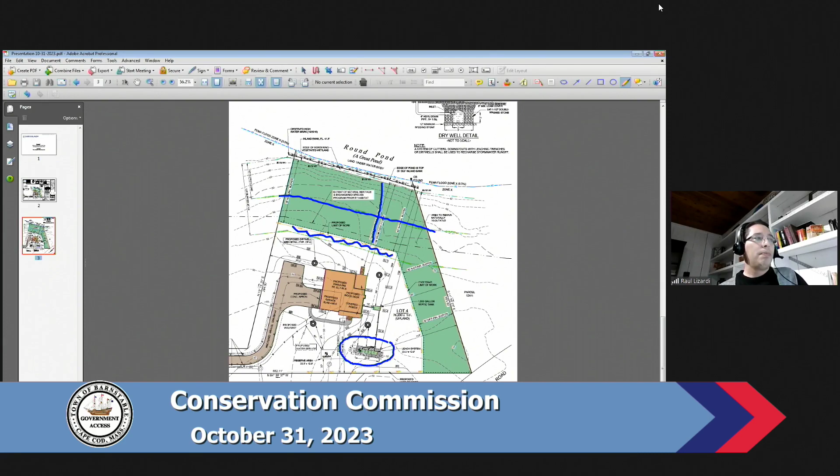The residence will be serviced by dry wells for roof runoff, and the septic system is located more than 200 feet away from that same inland bank. So the project is fairly minimum impact in the resource areas. I'll stop sharing and open it for any questions.

Thank you for talking to the homeowner to locate the house further back, outside the 100-foot buffer. Question from the commissioner? No one?

Any public comment? Channel 18. There's no public comment on this item.

Thank you. Could I have a motion to approve this project as a negative determination? So moved. Second. Roll call. Foster, aye. Tangney, aye. Lee, aye. Kern, aye. Gilmore, aye. That's unanimous.

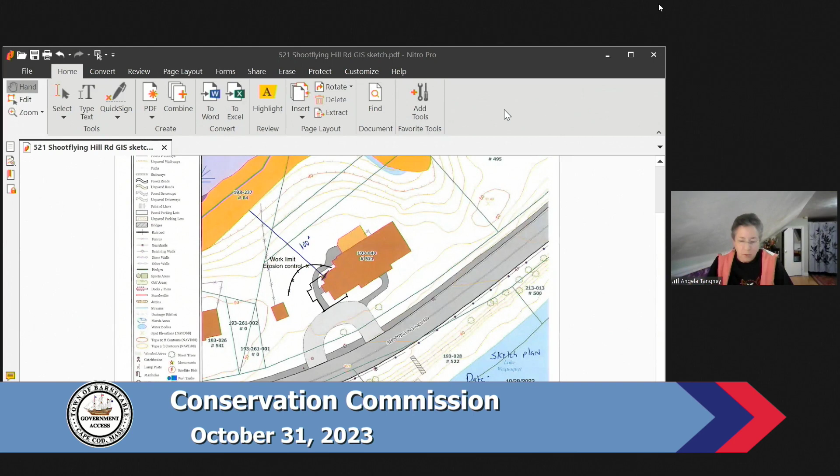Okay, thanks. George? Yeah, that was my question too, was to Darcy and how she felt about this project. So I'm all for it. Thank you. Same with me. I wasn't sure of the scale and the work limit lines, but if those have been answered and I just wasn't aware of them, I'm fine with it too.

Channel 18, any public comment on this? Not at this time. Thank you.

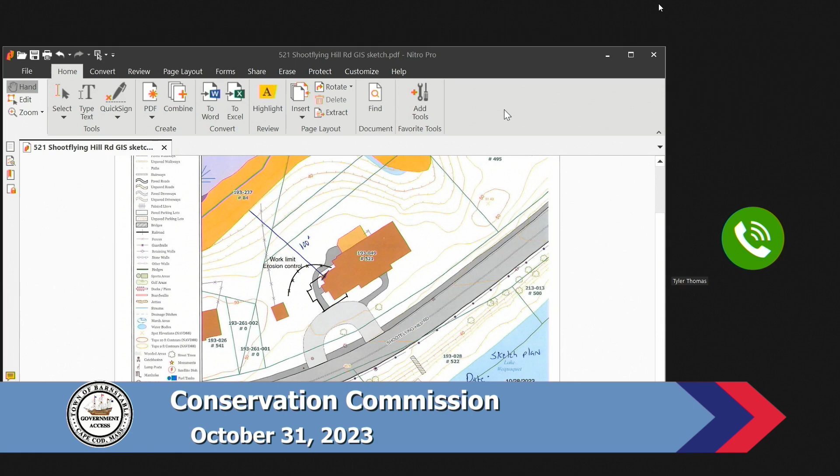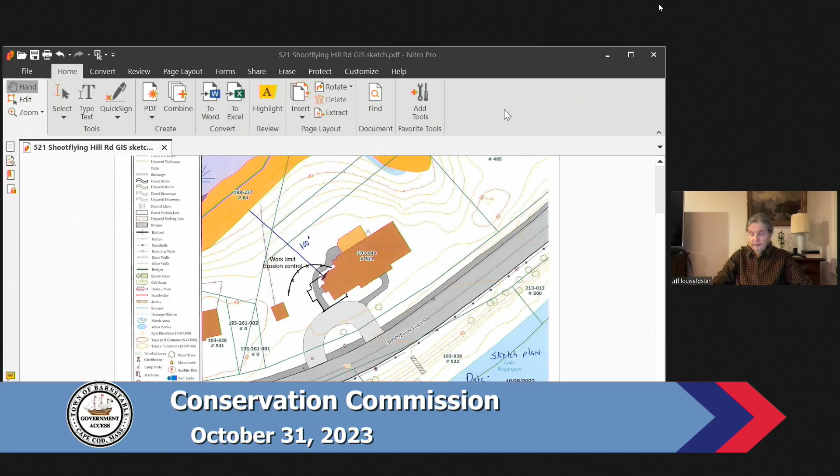Could I have a motion to approve this project as a negative determination? So moved. Second. Roll call. Foster, aye. Gilmore, aye. Hearn, aye. Lee, aye. Tangney, aye. That's unanimous. Thank you.

Good luck, Tyler. Thank you very much. Have a good night. Yep, good night.

The third RDA is Linz A. Vanderslice. Proposed improvement to include 135 square feet addition with a deck on the south side of the dwelling, a dormer and a roof deck on the north side, and a proposed 20 by 20 shed at 43 Little Island Drive, Osterville, as shown on the Assessors Map 093, parcel 058-006. John? Good evening, John O'Day from Sullivan Engineering Consulting, representing the applicant.

I'll pull up the plan quickly for you here. That's going to be on the agenda. One second. Please set that up now.

This is an acre parcel on Little Island. The resource here is flood zone, land subject to coastal storm flowage. A couple pretty minor improvements: a small addition on the south side of the building, 135 square feet, with a little deck area next to it. On the second floor of the dwelling itself, a small dormer over the garage with a roof deck.

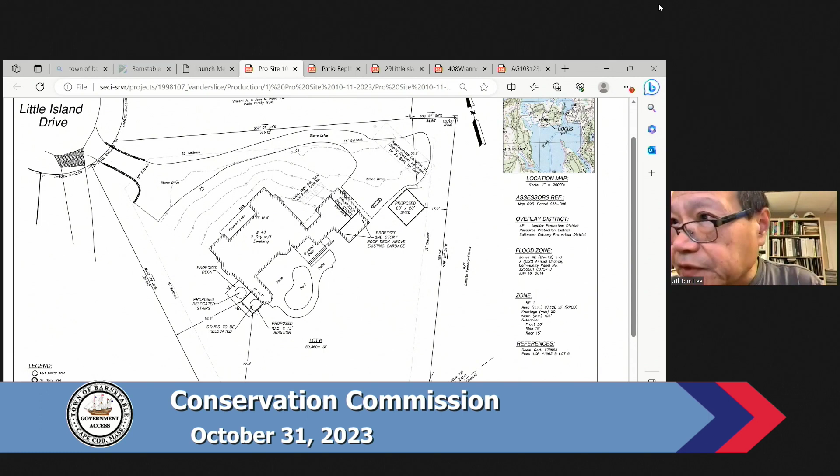Thank you, John. Question from the commissioner. Seeing none here. Channel 18, any public comment on this? No public comment on this item.

Thank you. Could I have a motion to approve this project as a negative determination? So moved. Second. Roll call. Hearn, aye. Gilmore, aye. Lee, aye. Foster, aye. Tangney, aye. That's unanimous.

Thank you. We have 4 NOI tonight. The first one is Michael P. and Maria Sarver, raze and replace existing single-family dwelling at 120 Harbor Bluffs Road, Hyannis, as shown on the Assessors Map 325, parcel 102. Dan.

Good evening, Chairman, members of the Commission. For the record, Dan Ojala. I'm a land surveyor and civil engineer with Down Cape Engineering in Yarmouthport. I'll share my screen here to show you this fairly straightforward project.

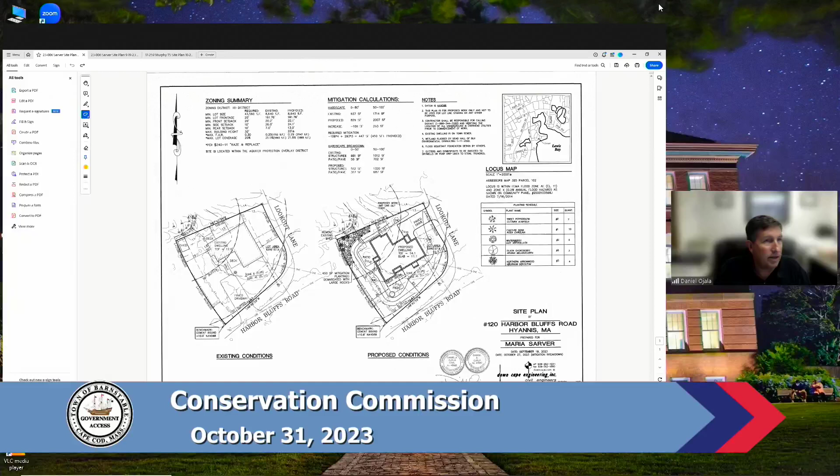This is a small home in an area that has public sewer, so that's one of the big items in this area. We don't have to worry about trying to squeeze in a septic with setbacks and pollution and so forth. So, tearing down the existing home.

There's a small isolated wetland behind us. Some of you may recall, to the north there was a somewhat larger home that was recently given permission to raze and replace. It's contiguous to a small IVW. That one had a fence sort of near the wetland, some of you may recall that. But in any event, this is kind of around the corner.

It's a highly developed site and lot. We're getting rid of a shed that's right against the wetland. There's a little IVW, so again it wouldn't be a state wetland, but it would be local. But then again, we are working in the flood zone a little bit here.

So taking a dwelling that nicks into the flood zone with some space below grade and picking it up, the slab is going to be elevated so that it's above the flood zone. Just a little bit of fill around the house to make it look normal. We're getting rid of the deck, which is close to 17.1, and we're going to be going to 22.7 in the back.

And trying to compress it a little bit towards the front of the lot. We've introduced roof dry wells all the way around to take care of the roof runoff, so we feel there'll be quite a lot less water shooting off or sheeting off this site post-development.

The pre-development runoff is one of the things you can look at in these flood zones. So we feel it's a good site development. It'll be good for the owner, good for the town. Would be glad to answer any questions you have on this one. I know you've got a long narrative, so I kept it short.

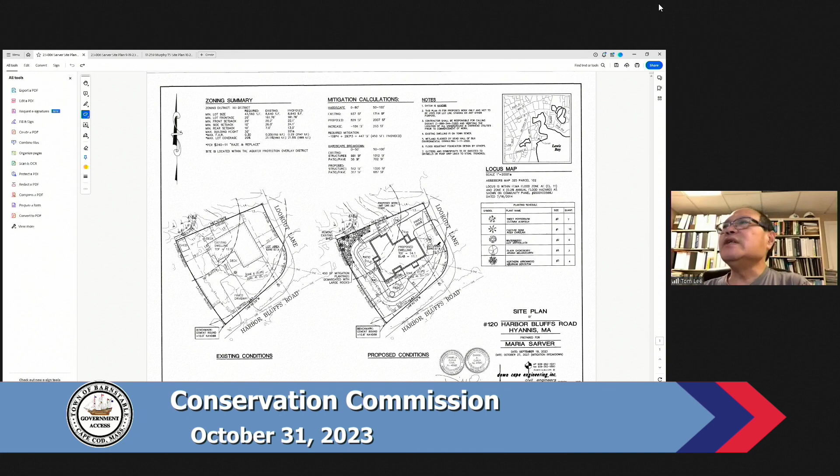Thank you, Dan. The drawing that Dan is showing is dated October the 27th, so it's a revised plan submittal.

George? Thanks, Dan. Thanks, Tom. And Dan, you mentioned a small amount of fill. How small an amount of fill are you talking, just so we know? From past experience, we've had small amounts of fill being anywhere between 50 and sometimes 200 cubic yards. So what are you talking about?

You can see here the grades - right now the foundation is fairly high, it's 12.6, we're going up to 14.1, so it's being raised about a foot. And so we're introducing higher grades around the house. It's already got a 13 contour on the north side here, we're wrapping that around the house.

The most fill is probably 2 feet right under the patio, and then it slopes quickly back down to grade. I'd have to do the arithmetic, but you're probably talking 40 by 40 by 2 feet-ish for fill. So some fill, but again, it's a coastal flood zone area - if you got a gigantic storm coming in and moving out, it won't be a pin in the bathtub with respect to that.

So you're probably under 100 cubic yards. I would imagine, yeah, especially because the house is most of it.

Thank you. Angela? Just quick for clarification, the revised plan - I'm not sure when it came in. I got it yesterday, Monday the 30th, and the only thing was the hardscape breakdown was added, or am I missing something? It was requested to add the demarcation, so there was a little bit better breakdown on the hardscape.

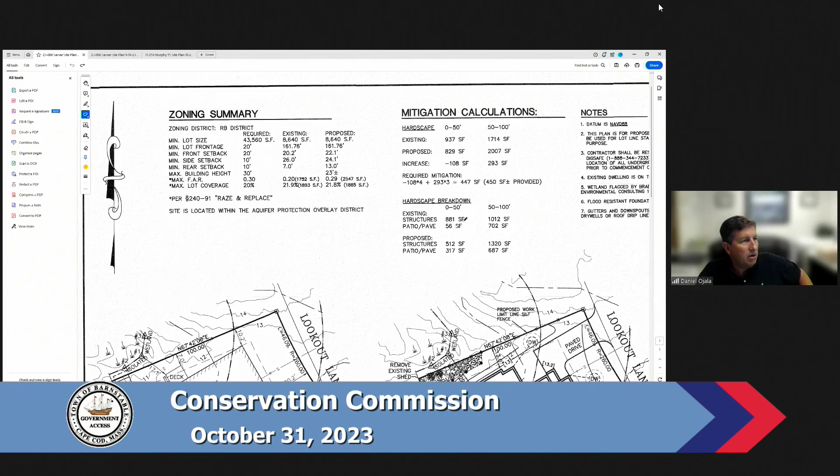We broke it out between patio, pavement, and structures. And then number two, we called out these rocks - there's a few different methodologies for demarcating the wetland, but it was requested that we show that, so that's the other thing we did. I did highlight the contours so you could see those a little bit better on the proposed.

Okay, thank you. I just want to make sure I wasn't missing something. No, nothing major, just little housekeeping items. Right. Because we just need a little bit more breakdown in terms of the mitigation area and so forth, for calculations.

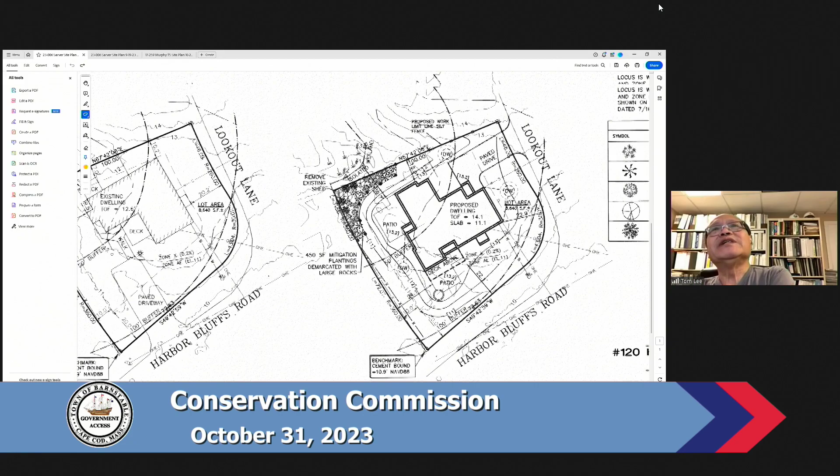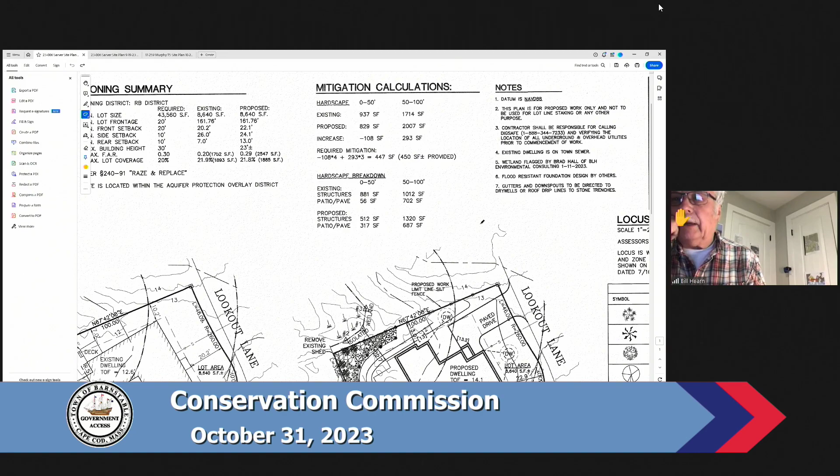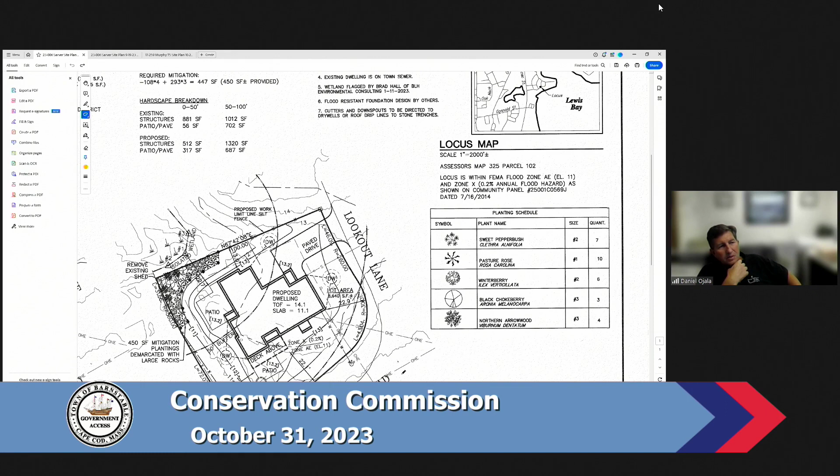Bill? Yeah, there's no mowing going on in that mitigation area, right? You basically just planting it and letting it go? That's correct, yeah, we wouldn't - it would be a no touch. I guess if there were some weeds in there, with Darcy's permission, we might weed it a couple times. But it's designed to kind of take over and become a shrub standalone feature, which would not have any mowing at all. Okay, thank you.

Any other questions? It's 10:18. Any public comment on this? No public comment on this item.

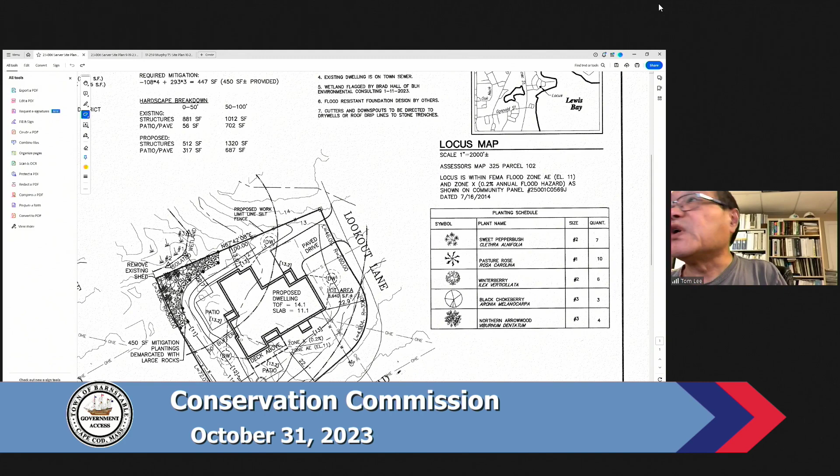Thank you. Could I have a motion to approve this project with the revised plan date October the 27th? So moved. Second. Roll call. Foster, aye. Elmore, aye. Hearn, aye. Lee, aye. Tagny, aye. That's unanimous. Thank you very much.

NOI is William and Krista Murphy, proposed single-family dwelling at 104 Wild Goose Way, Centerville, as shown in the Assessors Map 167, parcel 048. Dan. Good evening again, Chairman. For the record, Dan Ojala with Down Cape Engineering.

I'll share my screen here. So this one feels like I've been working on it all my life.

Here we are again. Honestly, the gentleman is serving our country in the Navy, and he goes off and doesn't know how long, so they've been trying to build this, but now it looks like we're finally going to have the opportunity to do it. But of course, the permit expired. So back we come. This is 104 Wild Goose Way.

It's in an area of developed homes. There's a tidal water body to the east, separated by a robust wetland. It's completely wooded, stable slope. It's technically a state bank. It wouldn't be considered a local bank because it's protected by a hardy BVW that separates it.

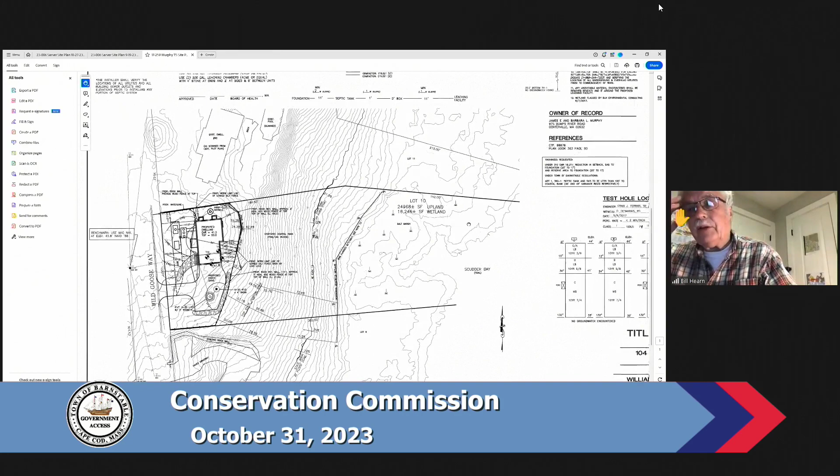What is a coastal wetland? I mean, you're saying it's not a coastal wetland, and yet it's a tidal Scudder Bay. The state says yes, tidal is a coastal resource.

But when we were reviewing the town regulation, we believe if you have a strip of bordering vegetated wetland, that would override the part about it buffering or being adjacent to a coastal wetland. Other coastal wetland being something like a salt marsh.

Right, because the key word here is adjacent to. So if there was a Spartina marsh, like a classic wetland marsh at the bottom of a hill, would that require a town bank?

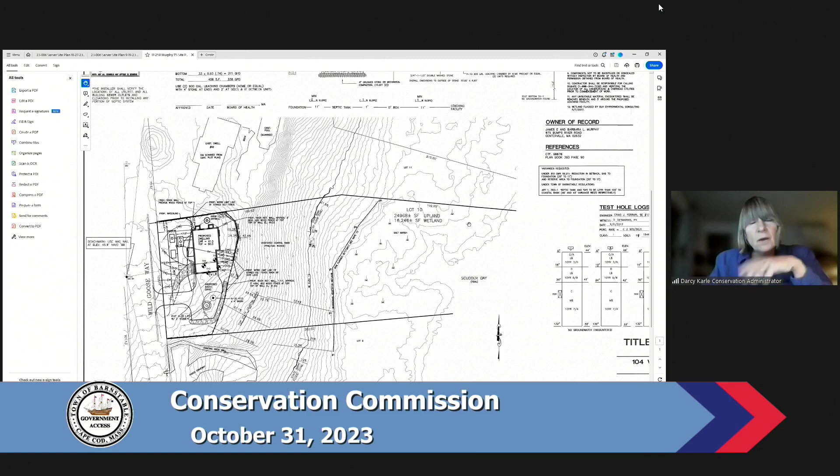Then what we do is we look at how high the king tide comes up to, whether that type of tide would come over the Phragmites. So if the king tide made it up that far, then that could be something that we would count as being a coastal resource area.

So it doesn't matter what the vegetation is, even if it's Spartina? Yeah, I don't think a king tide is making it up onto this bank.

I mean, you can ask Dan, but yeah, so the difference here, I think, is it's heavily forested and vegetated, and there's water coming out of the slope, a freshwater established strip of freshwater wetland upgradient of all the saltwater resource areas. And so that tips the scale.

If it were a more barren site or a scarp where you have a beach, you know, that sort of situation, then absolutely it would be a town bank. But here it's a forested wetland down into towards the salt marsh.

There is some salt marsh out there for sure, and then tidal, but there's a nice healthy BVW freshwater wetland here, and it's full of oaks and pines.

And so I think the interpretation, as it's currently written, is fine with this one, that it's protected from being a local bank by a freshwater wetland that completely separates the coastal resources from the upland. Thank you for bearing with me.

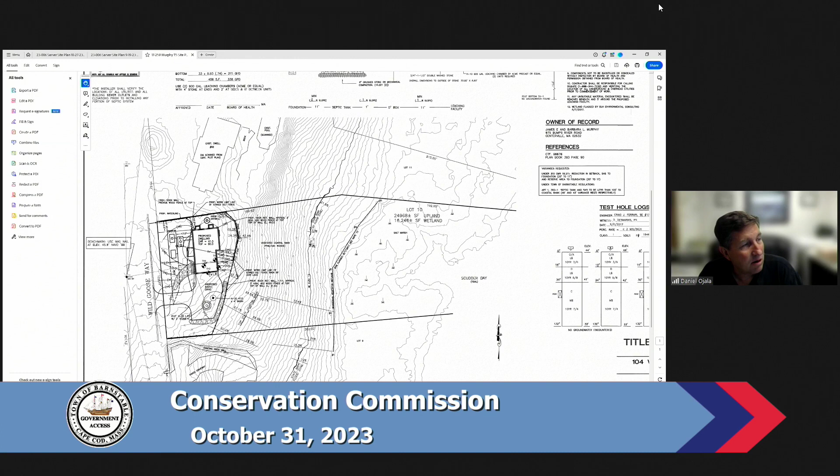But again, down here, it's not even 25% at the flood zone. So then it jumps back down to the flood zone. So it's a discontinuous bank.

It's not particularly well defined at the state level, but we teased it out carefully. And by no means is it eroding. It's super stable, you know, since probably the last ice age or whatever. This is just a big oak forest, and it's not going anywhere.

Okay, thank you, Dan. Thank you. Yes, thanks, Tom. No vista pruning in here.

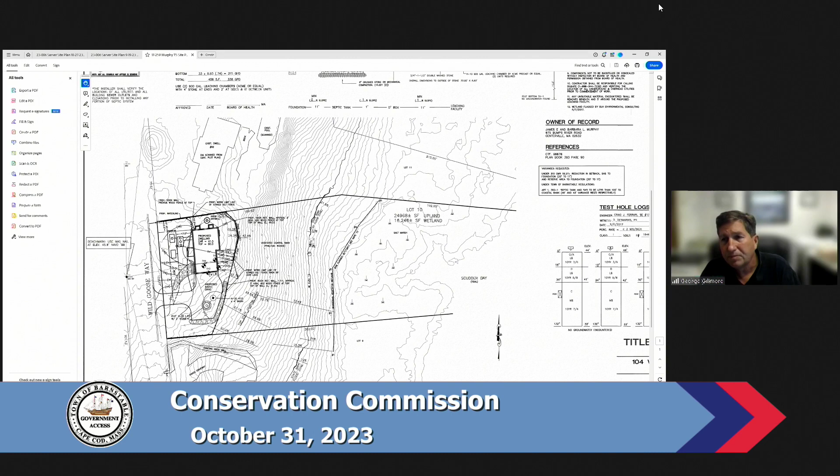Are you going to come back with that, I assume? Yeah, if they need it, we'll come back and ask once we have the house up. Yeah, okay, thank you, thank you, Dan. Any other questions from the commissioner?

Channel 18, any public comment on this? Not on this item. Thank you.

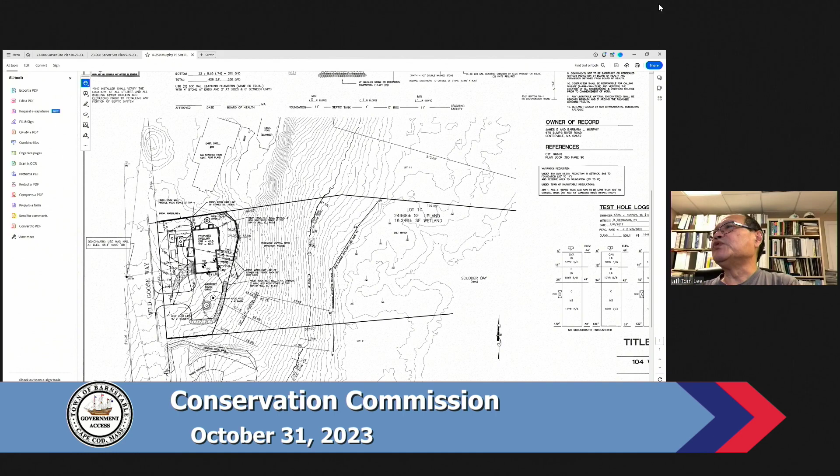Could I have a motion to approve this project as submitted? So moved. Second. Roll call: Tangney, aye. Lee, aye. Hearn, aye. Gilmore, aye. Foster, aye. That's unanimous. Thank you.

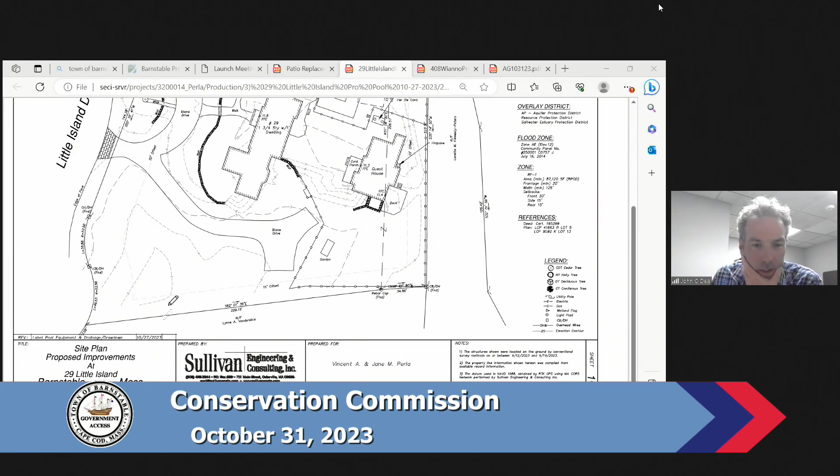This was a plan revision just to label - we had shown the pool equipment area and pool drawdown, but we hadn't previously labeled it. So this revision date was 10/27. Pretty straightforward, I'd be happy to answer any questions.

Any questions from the commissioners? Seeing none. Channel 18, any public comment on this? None on this item. Could I have a motion to approve this project with the revised plan date October 27th? So moved. Second. Roll call: Tangney, aye. Lee, aye. Hearn, aye. Foster, aye. Gilmore, aye. That's unanimous.

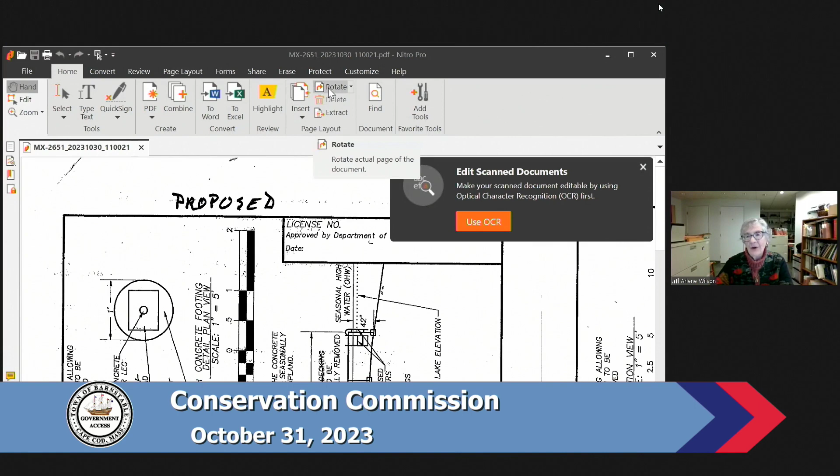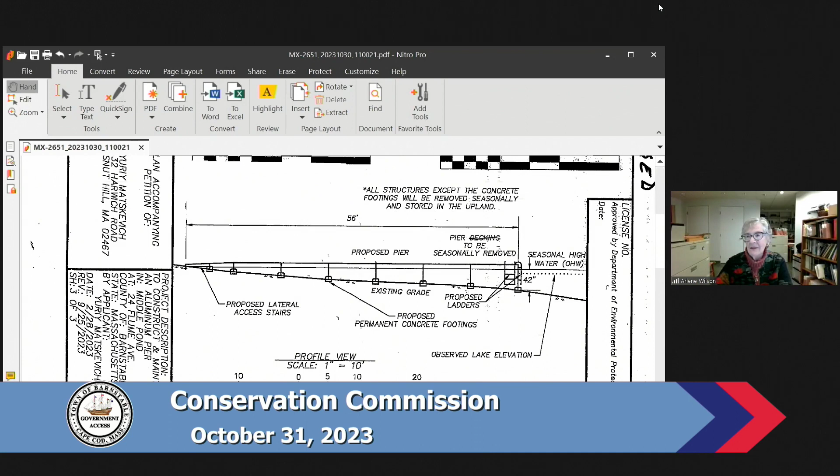Good evening, Arlene Wilson, AM Wilson Associates, here for the Matskeviches. This is, I hope, a fairly simple revision developed during extensive negotiations with Chapter 91 and as a result of wide-ranging public comment, as I think the commission is aware, from people all around the pond and all across town. Nobody seemed to like the helical piles we proposed initially, except Mass Natural Heritage and the contractor, who thought they'd work really well.

But what we're doing is changing that system to something akin to other projects that have been approved on the pond. They'll be formed round concrete blocks, 12 inches deep, about half of which will be buried. The concrete block will stay in the water all the time. The legs for the pier will fit into those blocks with feet on them for stabilization, and the legs and the pier itself will come out in the off season.

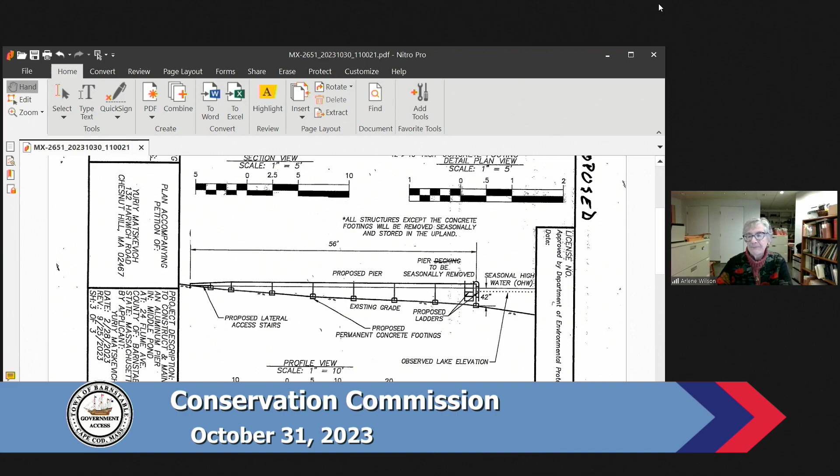There's no other changes to the pier itself, and I'd be happy to answer any questions. Thank you, Arlene. Any questions from the commissioners?

This is pretty straightforward as far as changing the support system away from the helical pile.

Bill: I'd like to recuse myself, only in that I was up until a couple of months ago on the Middle Pond Association board, and I recused myself when you first were permitting this dock. I'm not on the board anymore, but given that it's only been like 6 or 8 weeks, I think it's best if I recuse myself. So I'm not going to vote.

Okay, thank you, Bill. Any questions from the other commissioners? Angela: I wasn't here when this project originally came across. Are we going to have a quorum without him voting? That's fine, we should have enough. I'm not sure about that, Tom. If I might, this is a new application, the board hasn't heard it before, so 4 is enough. Okay, thank you, I was just asking.

No, that's the amended order. It's nothing to do with the previous application. So even with Bill recusing himself, we still have 4 members.

Any public comment on this? Yes, Chairman Lee, we've got Butch Roberts. Butch, you can unmute, it's your turn to speak.

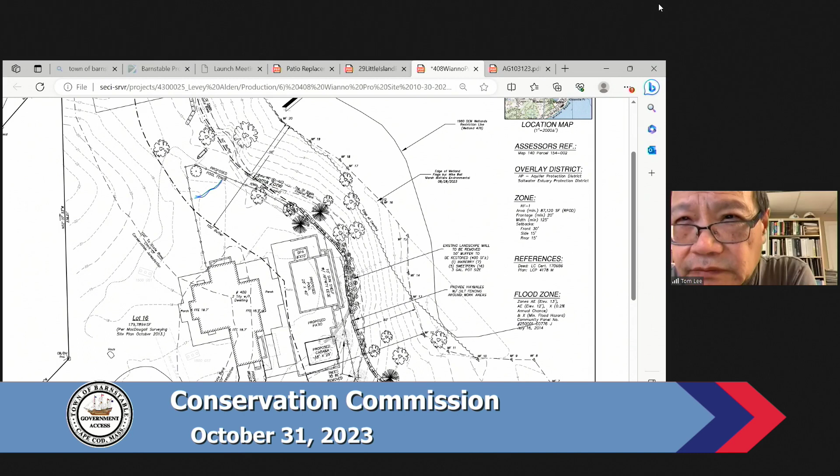John, do you mind saying that again in terms of the proposed change of the fence? So again, on the north end, the plan you had the fence kind of ending about here, and this revision extends it up about 20 feet more. You can see the edge of the lawn is the dotted line, so it's just bringing it more towards that corner point. You can see where the 50 foot buffer is - we're nowhere near it, we're really out in the existing lawn. On the south side, the fence on the plans you have came into this side of the garage, and we've moved it to the other side - again, that's almost out of the 100 foot buffer, but still in some of your jurisdictional areas.

What is the revision date on this one? This revision date is covered up by your faces, but I will get that to you in one second. Okay.

Questions from the commissioner, Bill? Yeah, there's a lot of extra hardscape built out from the 50 to the 100. And I know our town ordinance basically says as long as you have an intact 0 to 50, that's about all you need to do. And I know that's what the ordinance says, but the 50 to 100 does have value - it has value for wildlife as well as filtering pollutants and whatnot. So I'm wondering, I'm asking whether or not you have, on this plan, on the right, in the 50 to 100 foot buffer, it says proposed lawn on the left side.

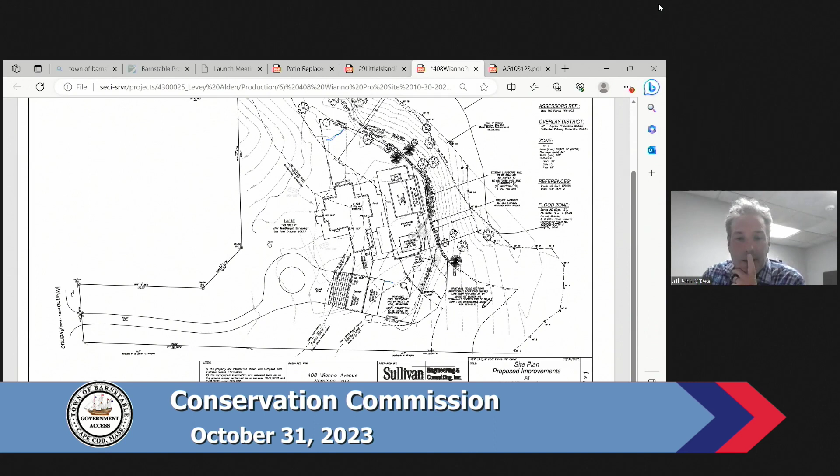So excuse me, then what is it that says proposed lawn? Where is this? What are we talking about exactly? How big is this new expanded lawn? I'll zoom back in, I think you can see. This was on the line that was on the plan you had, but the lawn was really just going to this dotted line and connecting back in. So in terms of what's in the 50 to 100 there, rough numbers.

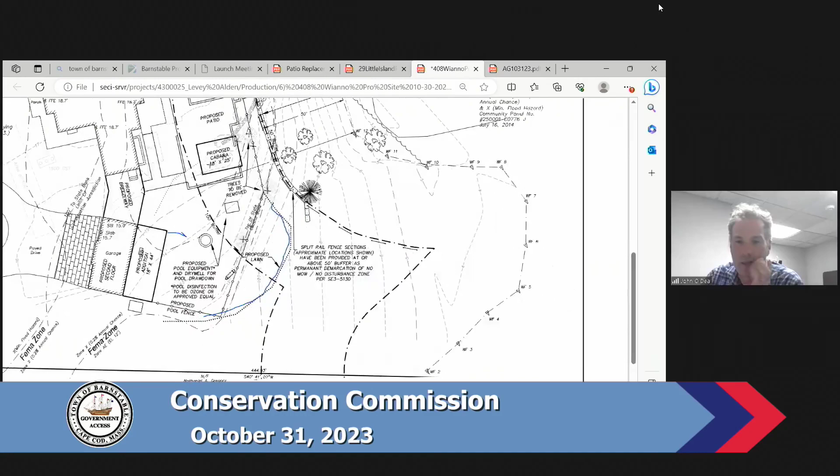That's pretty minor. My concern is I didn't get the dotted line thing. I was thinking we had much of the work limit, making sure to cut off and head back into the site in that area. We were not going out into the peninsula. So that big split rail fence section, that's still vegetated woods or what have you, right? Yes. Okay, then disregard my comment.

I was thinking you were basically going to create a lawn all over the 50 to 100, but it's just a little. Oh, never mind. Then I'm good with the project. Thank you, Bill.

Angela? Right, and when I looked at it, I thought the proposed lawn was where they're putting in the equipment now, so they wanted to be able to mow around the equipment, but nothing was going to be lawn extending out where that rail fence is, correct? When I looked at it, that's what I assumed. No, nothing's heading out to where the old demarcation is.

This dotted line, which should be on the plans you have, we can make sure is highlighted when getting this revision into them. But this hasn't changed from what you had, and this was the proposed edge of lawn. And the marked lawn had two arrows, which I couldn't see on the map, but when I went out there, you were proposing towards the equipment going. Yes, so between the cabana and the garage, this. Yes, you got it. Okay, thank you.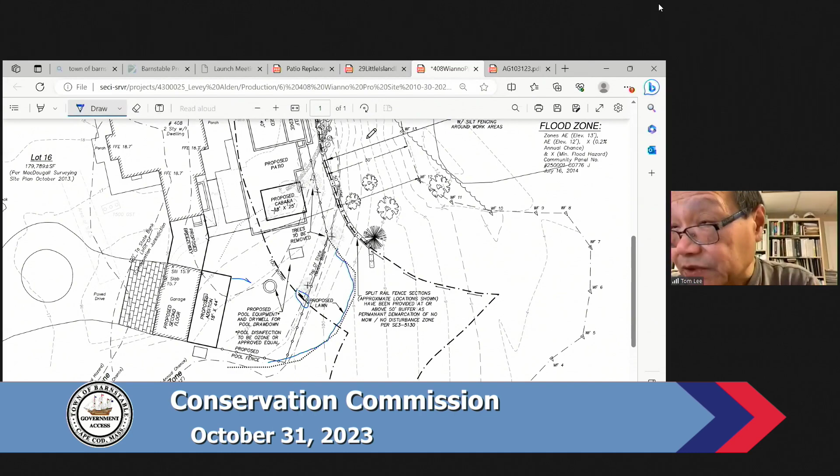And the wait team, any public comment on this? Was there some plan to build some sort of sports court or pickleball court of some sort?

Who's this, the abutting neighbor from 390 Wianno? What's your name? Auong, 390 Wianno. Kim, did you get it? Kim, you unmute yourself. No, could I get your name again please? Auong, 390 Wianno Avenue. Thank you.

If you look at the drawing, I think on the west side there is a proposed sport court. I think, John, do you want to go there? I'll bring it back up and zoom out again so we can see that. So yes, there is a sports court.

The question is the matter of noise, because people who have lived in various places, Florida and all the people we know intimately, I'll say they're very noisy. And we have senior people in my property, 390, who sleep late and have to sleep early on doctor's orders, and they cannot tolerate noise. Now you're talking about a ping pong table is one thing, but this is a giant ping pong table, according to my friends from Florida who have neighbors with that kind of setup.

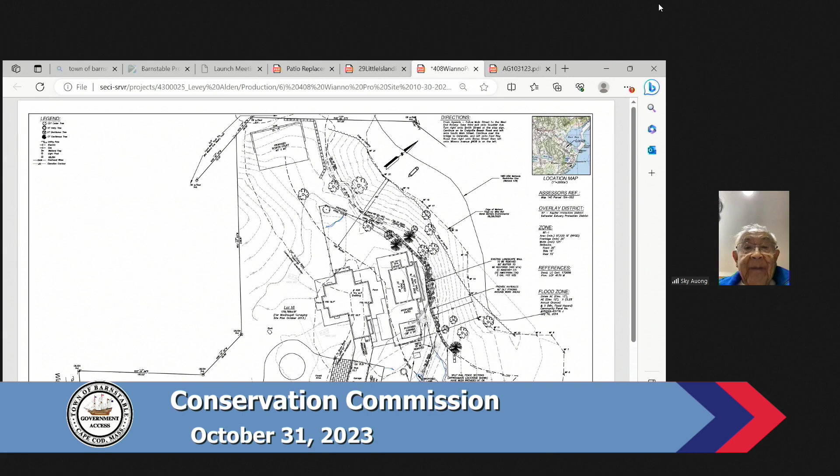Please, and I'm sure there are many other neighbors who may not be aware of it but have the same feelings. I talked to a couple of neighbors to the right or left of the property we're talking about. Okay, so bottom line, no pickleball court.

You want to put 10 ping pong tables, small ones, the little balls don't make that much noise. The issue with us is noise and annoyance throughout the day. Yeah, like a putting green is quiet. Even a tennis court is much quieter because that's a much softer noise, not as noisy. Or a golf putting green. Okay, thank you. Many of my granddaughters play tennis, believe me.

And the noise of tennis is not nearly as bad as what I was told about this situation. Thank you, sir, for listening.

John, you take a look at that with your client as far as whether that sport court should be there or not, because you need to deal with this concern. I agree, this is a neighbor concern, really not a conservation concern. We will make sure the applicant is aware, and that's all I think we could do at this point. You need to deal with the abutter in terms of the location of the sport court, but that's between you and the abutter. From the conservation standpoint, I think this is good, but you can submit a revised plan if you need to redo the sport court locations.